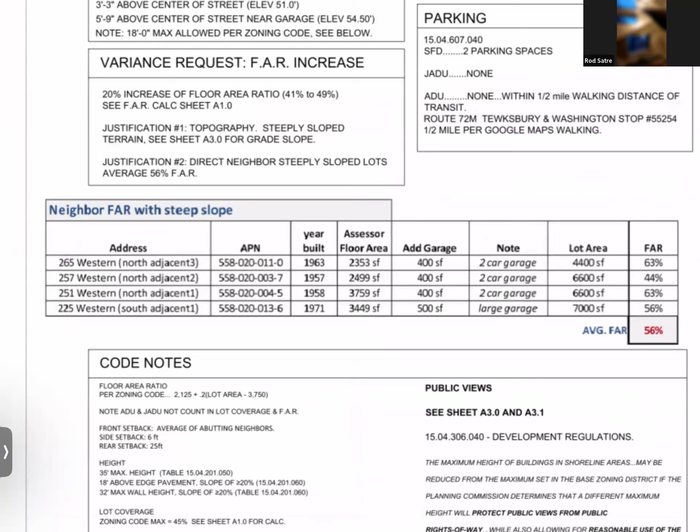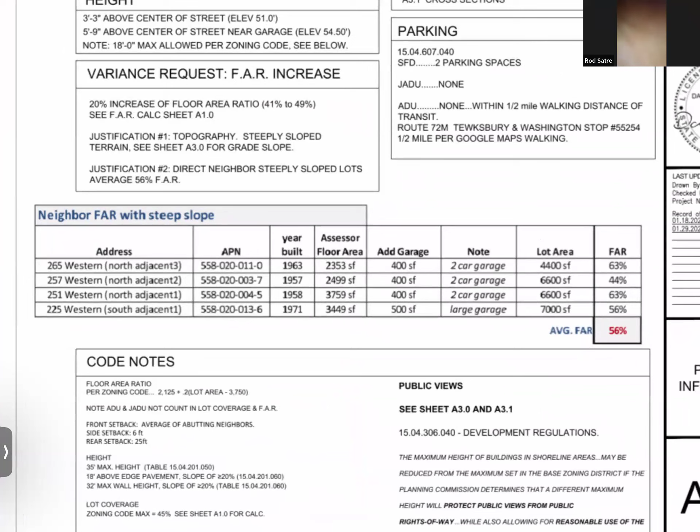Well, one of the things I did is I added the data for the floor area ratio for the adjacent neighbors with similar lots. The planning department asked that I put that on the drawings since we talked. And the average is 56%. You can see the numbers.

And what we're doing as far as the variance request is a 20% increase. The way they calculate it is tighter than it was in the past. So 41% is the code allowed, and we're asking for 49%. That's a 20% increase of the floor area.

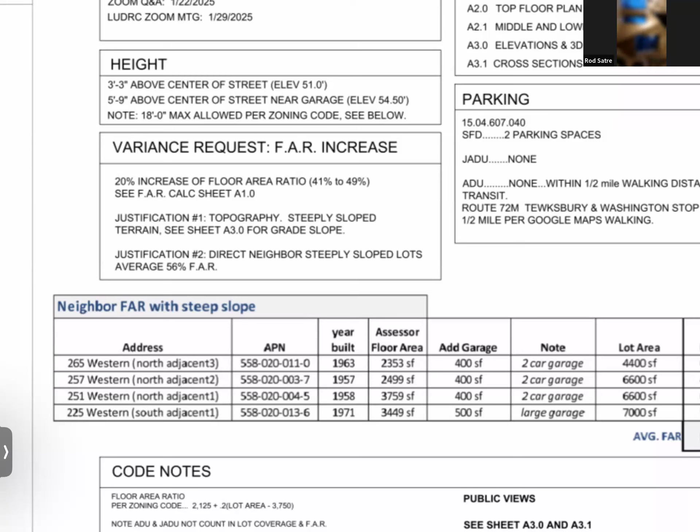Can I ask a question? Can I ask a quick question - are you giving all the neighbors for a comparison that they have the same kinds of variances you're asking for?

Oh well, because you realize they were grandfathered in. Oh yeah, I'm not, yeah, I understand that. The planning department just said when you show the neighbor's floor area ratio as a comparative, do the lots that are, I guess, west of Western, towards the ocean from Western, because they're steep and similar types of lots. Okay, I get it.

Like there, you can see the year built: 1963, 1957, 1958, 1971. There's additions and stuff like that. But anyway, that's it - I mean, again, that's discretionary, so it could be.

Well, they might have had different requirements then - there was no floor area ratio other than for commercial buildings until a few years ago. That could be recent. But new builds are expected to conform as close as possible to new requirements, correct? Right. So I mean, the code is 41%, and we're asking for 49%. That's the ask.

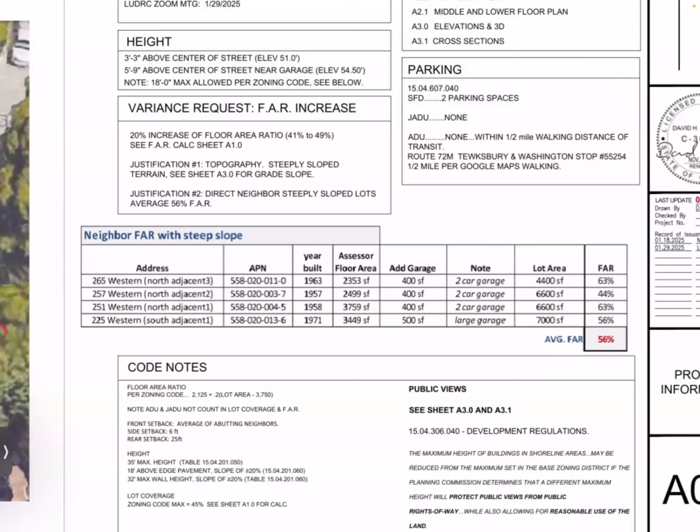You can say no. And the hardship is - the only hardship we can say is steeply sloped terrain. So that's the justification.

Basically the surface area of the lot - imagine you have two lots, same square footage. One is exactly flat, and the one slopes it, very steep, 45%, say, or 45-degree angle. Then the surface area of the lot that slopes actually has more dirt. Yes. And so that's the justification.

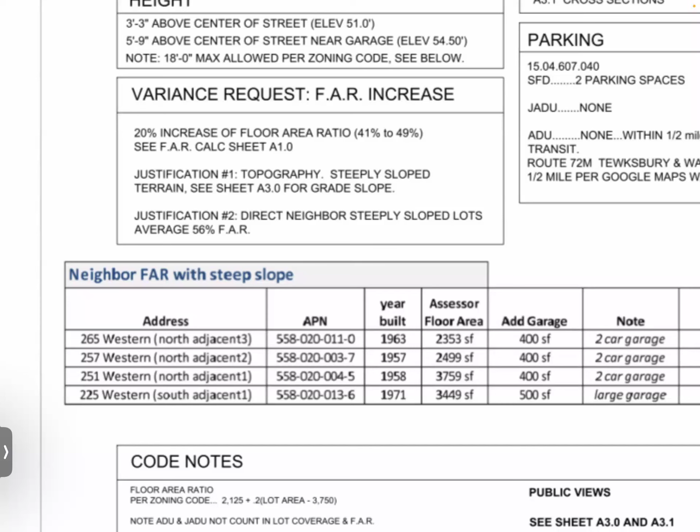So that's what we're asking. Are you guys okay with a 20% increase, a 10% increase, or a 0% increase of the floor area ratio? We have to get all the neighbors to also get their thoughts on what you want to exceed. So that's the one thing we're asking for extra, and I understand that's discretionary. So if we go to...

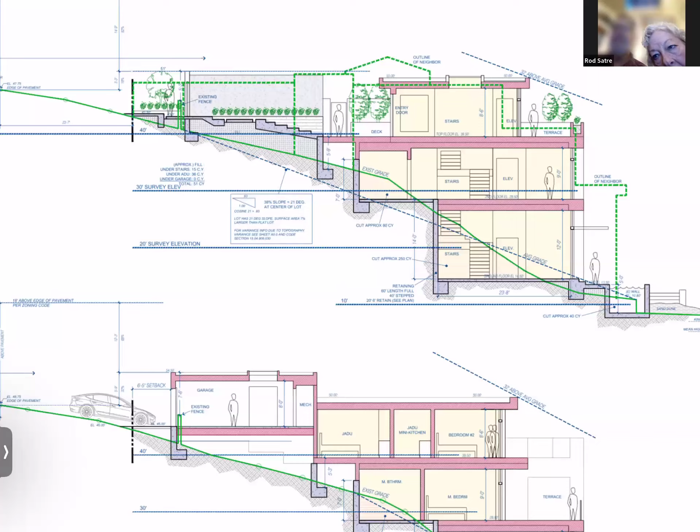Look at, I did the math on that. Hang on a second, let me scroll. Sorry for scrolling. So here it is. You can see the slope of the lot, the surface area is different than the surveyor shows, because the surveyor only does it from an aerial view, assuming your property lines are as seen from space. Here's the math: we got a 38% slope, and so on, cosine, yada yada.

So that justifies 7% on the lot slope. We're asking for more. So that's one thing you guys need to contemplate.

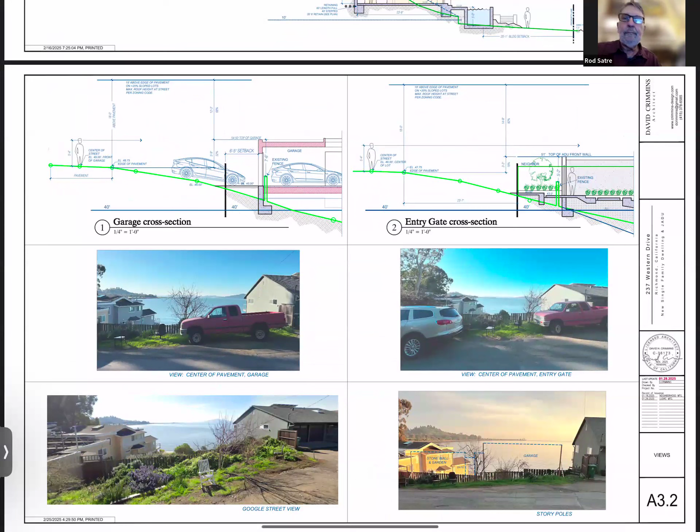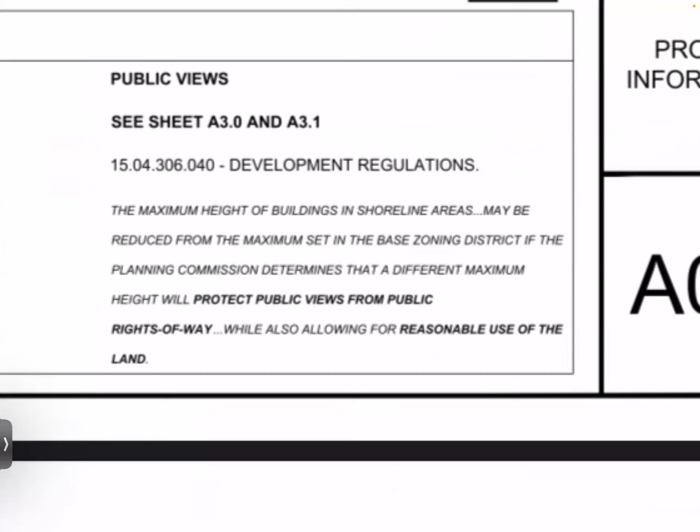And then last time there was some concern about the views. So that's the other discretionary concern. Let me quickly show you, this is a continuation of the conversation from last month. So here's the text, sorry it's a little grainy, of what the code says about views: protect public views from the public rights of way, while also allowing for reasonable use of the land. Now that's fuzzy, but that's the other discretionary item—how much house, how much protected views. So that's what we're asking you guys to think about.

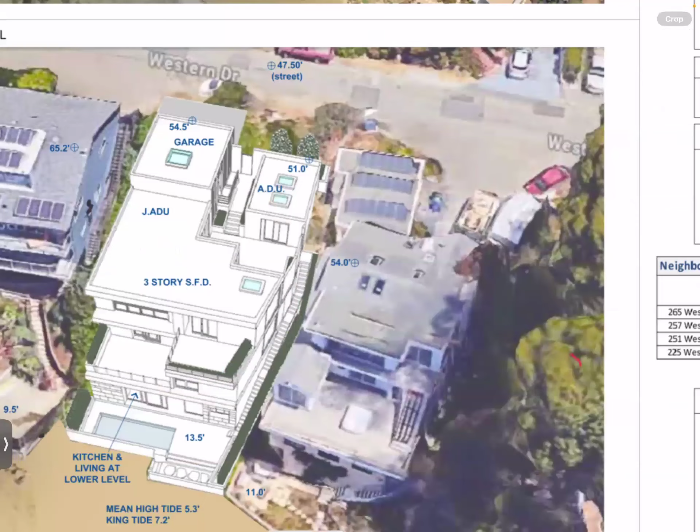And I assume everyone's already seen the shape and size of the house from last month. You said nothing's changed? Yeah, I didn't change the design—I'll take that back. I changed the design very slightly after consulting with the planning department. I'm scrolling.

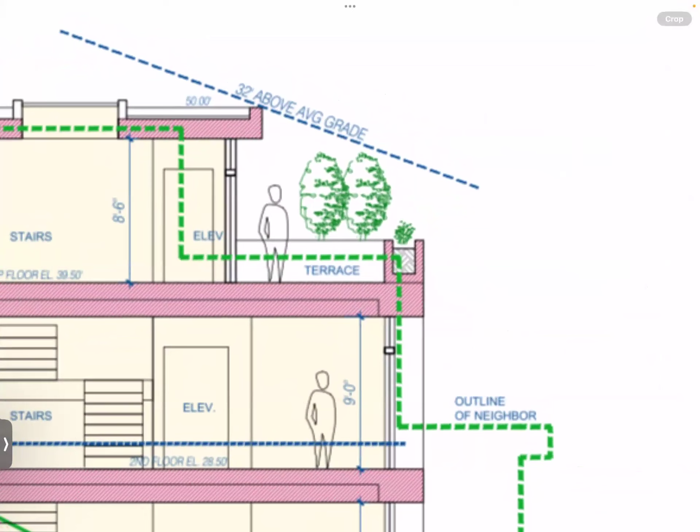See what it says, 32 feet above average grade. And we were a little into that, so I had to cut the top floor back 1.5 feet to manage that. You wouldn't know without me pointing it out, but we were into that 32 foot above grade limit, which breaks a zoning rule. I just didn't want to ask for another variance—it's easier to chop a building by 1.5 feet. So that's really what the change was.

And then I threw all the photographs I have onto one photography page. So you remember this shot here—this is an architectural presentation of the view as you're standing on the road. I took some liberties here, I put this together on the computer. So some people said, well, we want to see the photos, we need to see what it looks like really.

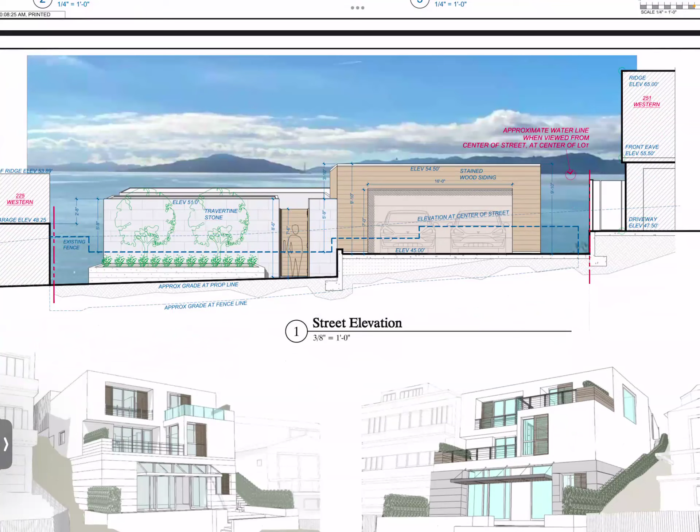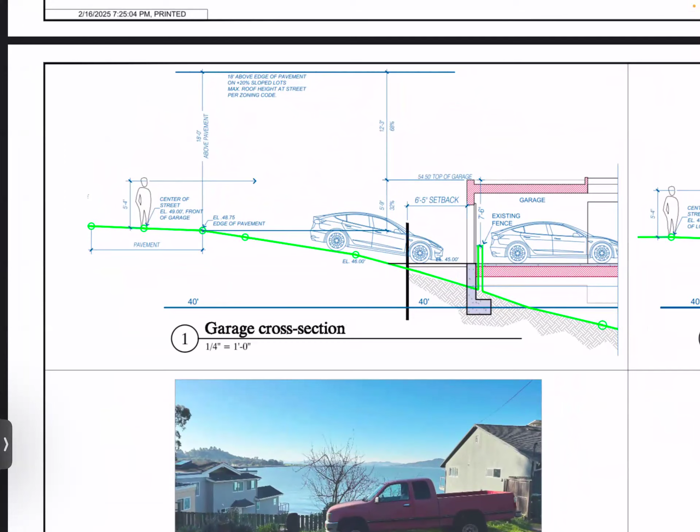So I added a sheet, which is what I emailed to everybody yesterday. Sorry for scrolling, I added the sheet here. So basically, if we do an analysis of the cross section—if we stand right in the middle of the street, in the middle of the garage—you can see the math there, the cross section. Your eye level will be right about the top of the garage. And the code allows us, reading from the code, 18 feet above edge of pavement on 20% slope lots.

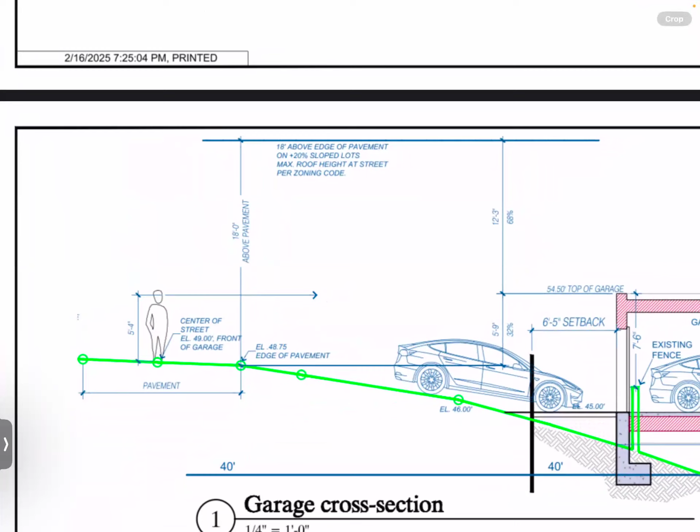That's the maximum allowed by code. But we also read the code that says protect public views and reasonable use of the land. So what I'm doing is showing that the code allows 18 feet, but we've got the views to protect. So right now the garage is at 5'9" of that 18 feet—you can see that there.

Yep, so that's the garage. And the garage is a little higher than we would love—we would like the garage... we don't really want the garage that high, it's just getting a car into it is a factor. You guys can say, hey, we want to drop that garage by 1.5 feet, and I'll have to just work it out, for example.

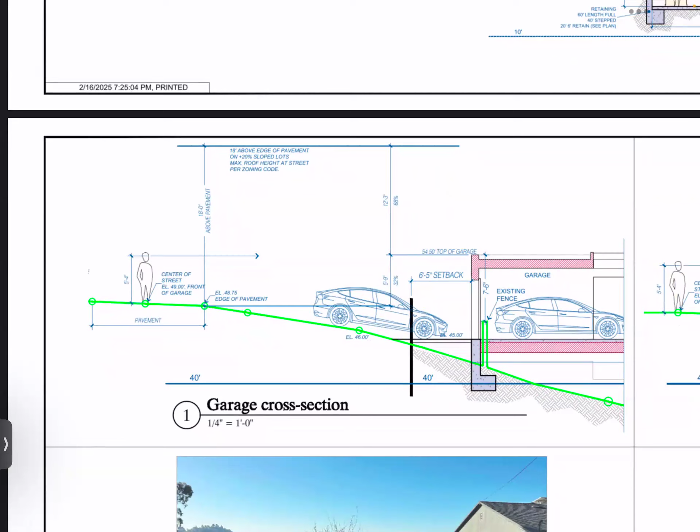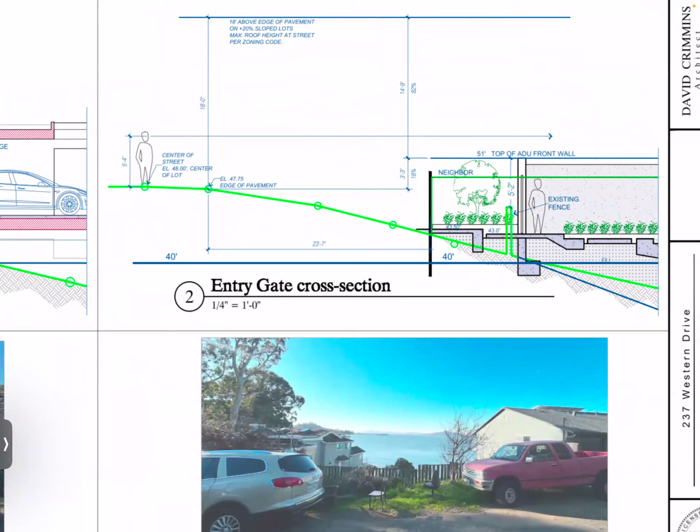And then at the lower portion, this is a cross section at the ADU in the front gate, which you can get some steps down to, you can walk down to it. So that is, you can see the eye level and how you can see over it—3.3 feet, 3 feet 3 inches above edge of pavement. And then of course, someone standing at the pavement is, you know, 5'4" eye level, I assume. Is that 5'4"? Yeah, 5'4".

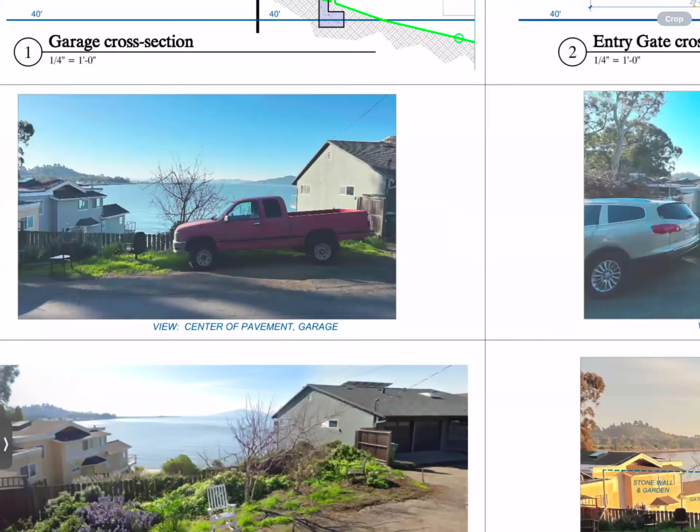So the story poles are up there, anyone can walk by. Anyway, here's another shot. This is center of pavement in front of the garage.

So the top of the garage is 1 foot below the eave of the greenish gray house, the front eave, 1 foot. Is that on the left or the right? On the right. You go to the corner of the eave at that house on the right, go down 1 foot, and that's the top of your garage.

And then the garage comes across approximately to that little tree. I don't have it marked because we didn't have story poles up when we took this picture. And then the other portion of the house drops another 3'10" from the garage, and the sum is it's 5'9" above the fence, that's to the left.

And then here's another shot. This one is from Google Street View. So take for example the yellow house, the garage at the far left of the image, that's the flat roof of the garage.

So we're 2'8" above that flat roof. So if you go 2'8" above that flat roof of the garage to the left of the yellow house, go across the approximate center of the lot, you go up another 3'10", and you terminate approximately 1 foot below the eave of the house to the right.

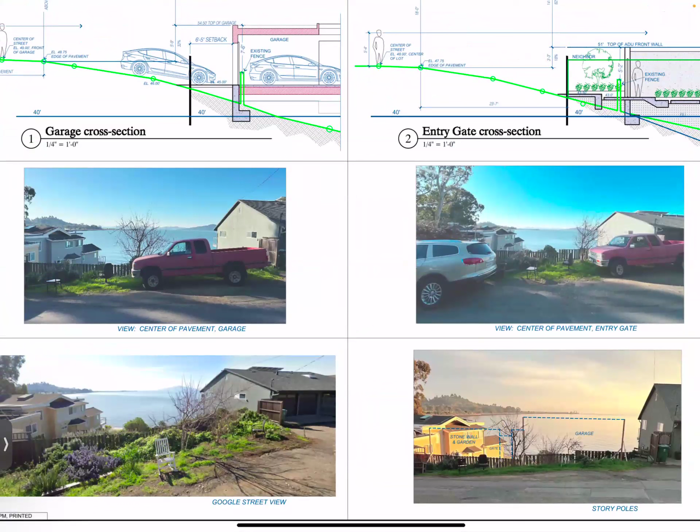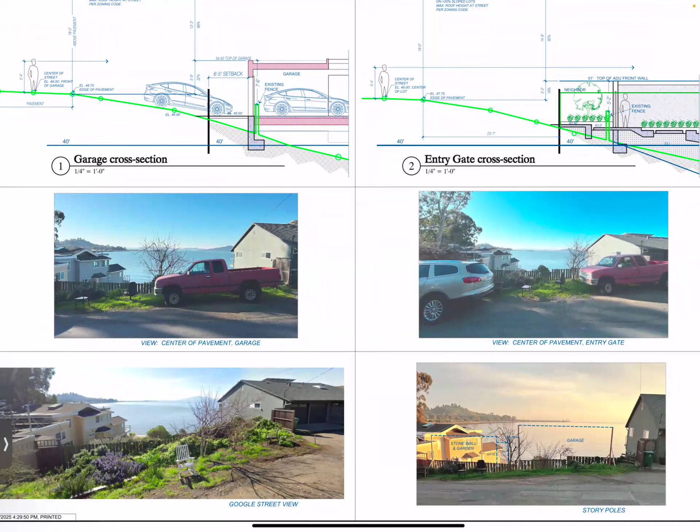And with another picture, yeah, I just tried to throw in all the pictures that are informative, and I show the math so you guys can mull over what best to do. Did everyone see the floor plans and the pool down near the beach and things like that, or do you want me to run through that, or is that unnecessary?

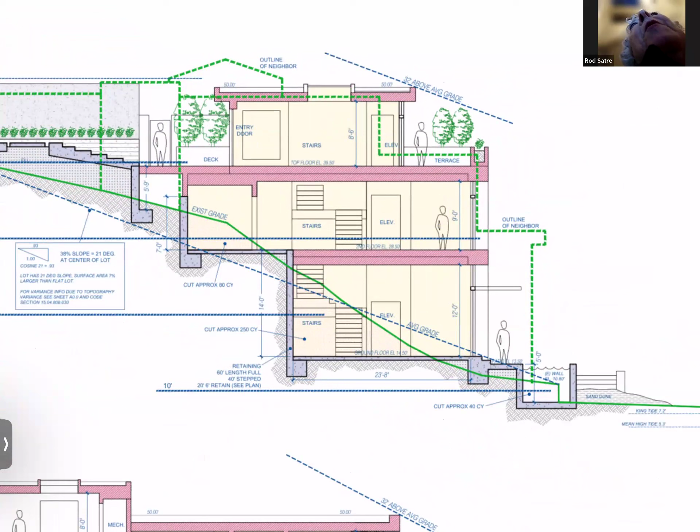So basically what's happening, I'll start with a cross section. So basically all the action is on the beach, right? So the kitchen and the living room will be on the beach, and there's a small pool as well on the beach. That's on the bottom level. Yeah, on the bottom. So the owner preferred interaction with the beach and that kind of thing more than the view.

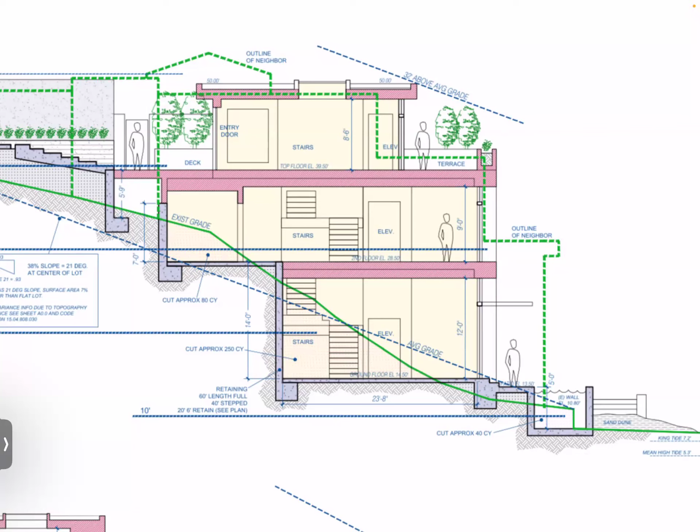And then the middle floor is basically the master bedroom. Top floor is kids' bedrooms, guest bedrooms, things like that, and of course the garage. And there's an elevator in there too, as you can see, ELEV.

And so, in looking at the layout, where is it shown? Here it is. Okay, so this is the roof plan, and you can see what's labeled ADU, that's a guest cottage.

It's about 500 square feet thereabouts, and then you can see the garage labeled. To enter the house, you go through this gate, down some steps to the front entry door, and then it terraces down from there.

So is there two ADUs here? There is a junior ADU and then an ADU. There's a legal differentiation: an ADU can be a separate cottage, while a JADU is connected to the house. An ADU is allowed to be separate, whereas a JADU is internal to a house.

Right, so the separate one is 500 and what square feet? Let me just double check. The ADU maximum allowed is 800 legally, but we couldn't fit it.

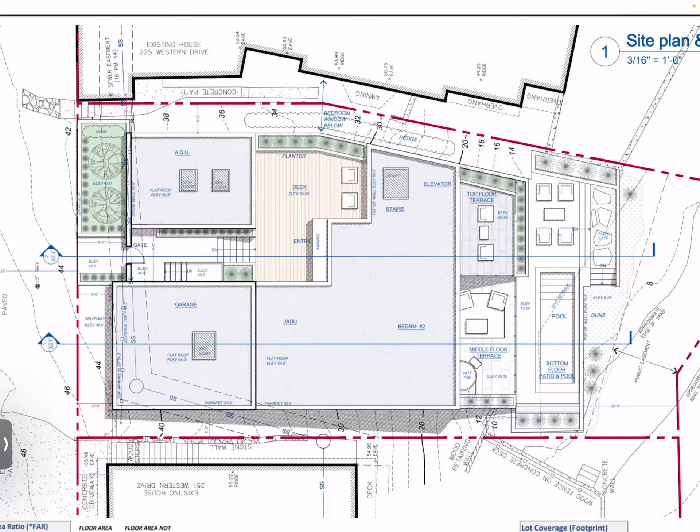Give me a second to look it up... where is the data... I have to get to the right place. So it's on this sheet. Here's the square footages. The ADU is 385 square feet, so it's quite small. That's the separate building one.

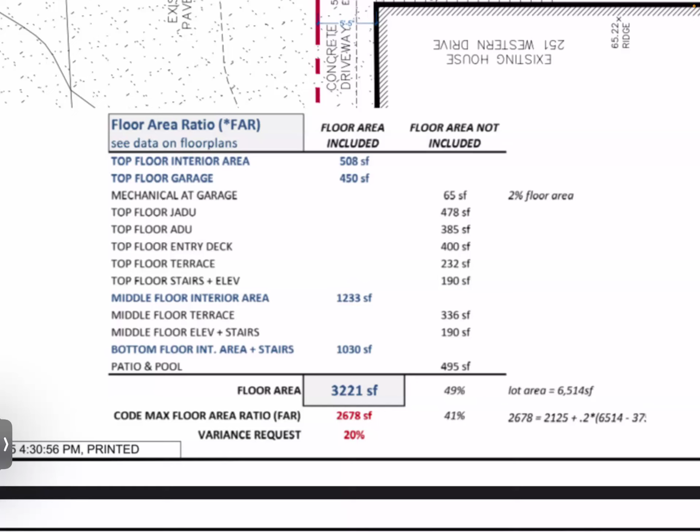Okay, and here's the math on asking for the 20% variance, on the site plan, sheet A10. And by the way, the other thing we luckily don't need to ask for variance on is the footprint. The maximum footprint is 45%, and we're at 40%.

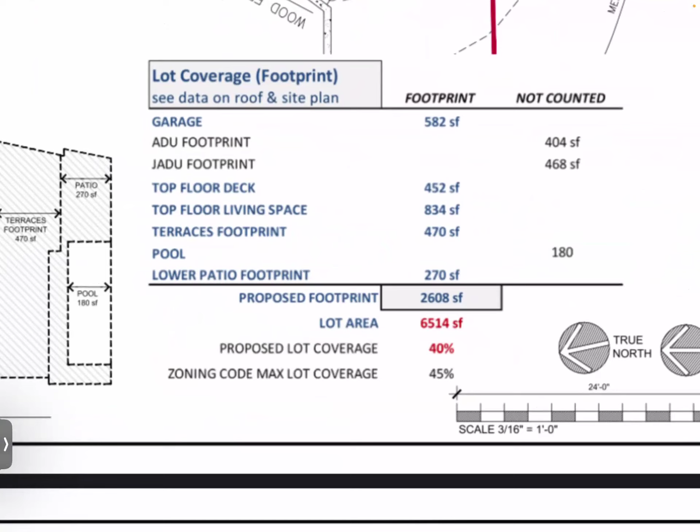That's obviously because it's a 3-story house, everything's stacked on each other, and so the footprint is just the outline, how much dirt you leave. A 3-story house, of course, is going to make it underneath the footprint. That's called lot coverage, same thing. And the total floor area—they don't care about floors, just how much floor area you have. And here we have it.

Is this a change from last time? No, it's the same. Okay, so the only architectural change was I did that thing with that height—the part of the house was sticking out, it was outside of the zone of allowable height.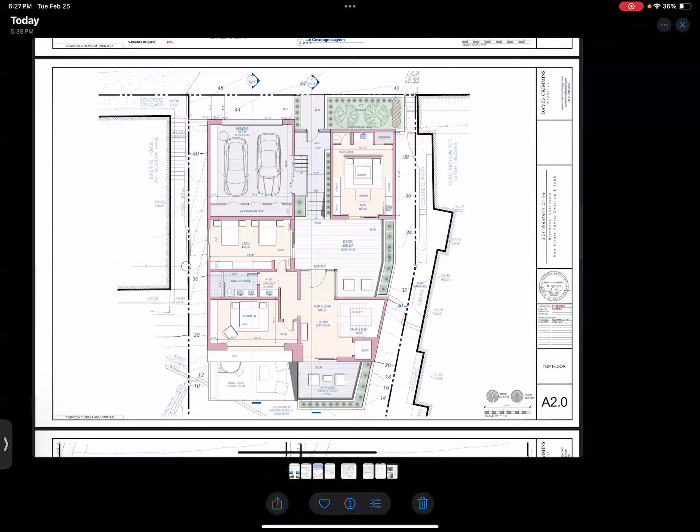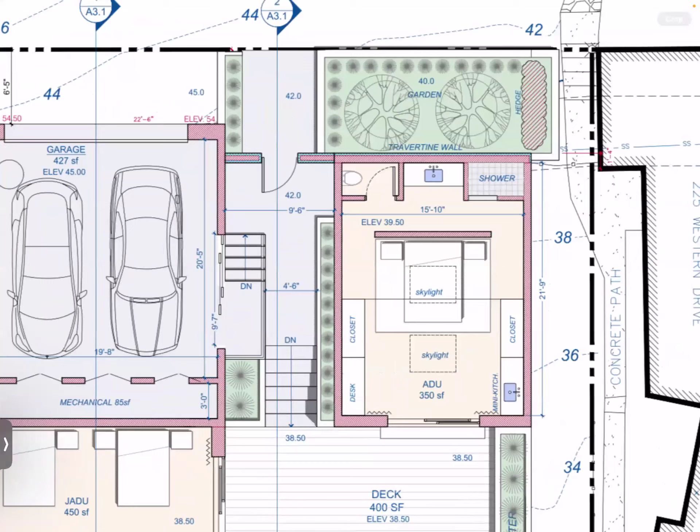For the people who haven't seen the floor plan before, here's the floor plan for the top floor. You go through in the middle, through a gate, and at the street frontage we have a yard, and there's a travertine wall—so for a passerby it should be quite pretty. A travertine wall with the garden in front, and then the occupant goes through the gate down to a deck which is private and sunny, into the entry, where the kids' rooms and guest rooms are. Downstairs is the master bedroom, kitchen, and living room.

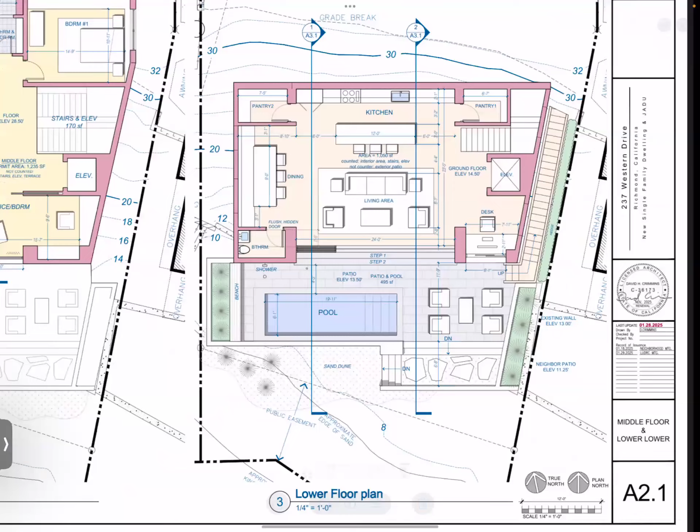And this is the ground floor. Last month, people said BCDC might not want that pool on the beach and that kind of thing. That's the next group we have to go talk to.

One of the questions I wanted to ask is, how wide is the building at the street level, and how wide is the lot? The lot is 60 feet wide. We're required a 6-foot setback on either side, so that's 12 feet total.

So the house is how much? 48, is that right? Yeah, 48, doing the math. So it's 6 feet on each side—you've basically swallowed the lot with the house. I mean, the house has swallowed the lot.

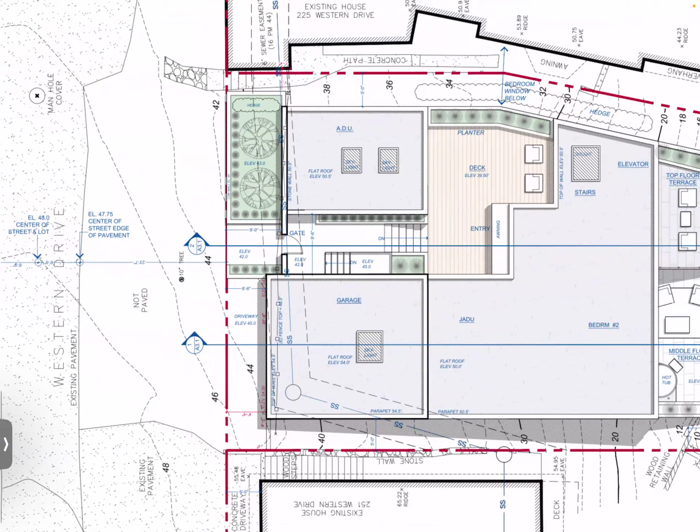It doesn't sound like there are very many view corridors for people to look around this house because it's so big. They can kind of see over it, hopefully.

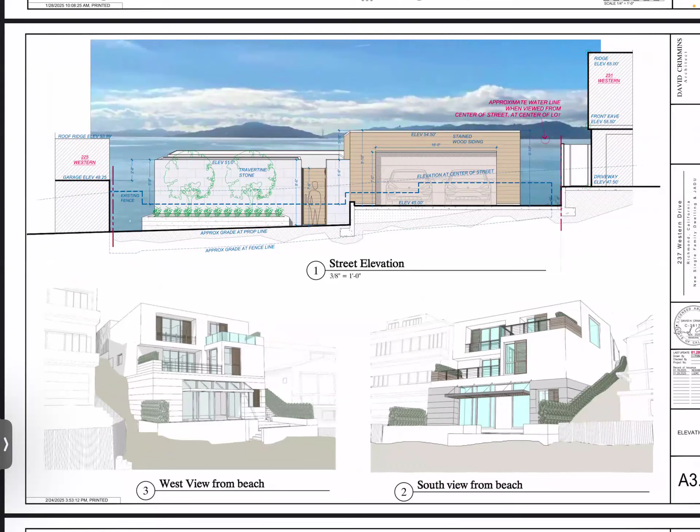I'm sorry to interrupt, but I went and took pictures at my viewpoint, not at the edge but really about two-thirds of the way across the road. I could not see—I drew a red line there if you guys want to look in the chat, we have pictures of it. There is zero view, zero. Looking at the lower poles, unless I go up to the driveway of Susan's house across the street, there is no view. It is completely view blocking for people unless you are tall.

Yeah, I know, we really should have these pictures with the story poles in it. That's why, if you look in the chat, I showed a picture I took and drew a line across the lower poles at my eye level. It's in the handout we sent in, unfortunately late, but you can see in the chat that there is zero view. I can see the sky fine, but zero water, zero land view at my height.

Well, if I hike uphill and go on the opposite side of the street, I can maybe glimpse a bit of the tip of Angel Island. The main thing is that someone passing through is probably not as permanently affected as someone who lives across the street or whose view is blocked.

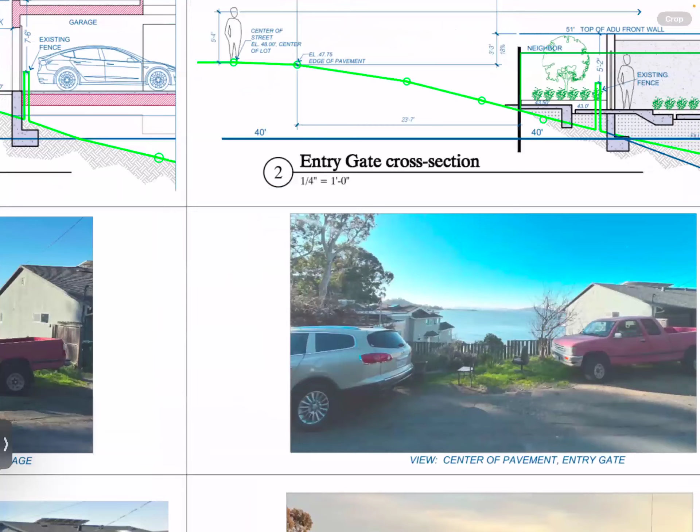And Jan, you are right on the water, aren't you? You're the yellow house. So it's not just for me, but I thought there was supposed to be some sort of, I mean, Jeff Shea wrote when the Knoxes were building their house, that they should keep it low so there's a view corridor. And now there's zero view corridor here. So I'll shut up, I know it's not my turn to talk.

Oh no. I've said all I mean, I've shown it.

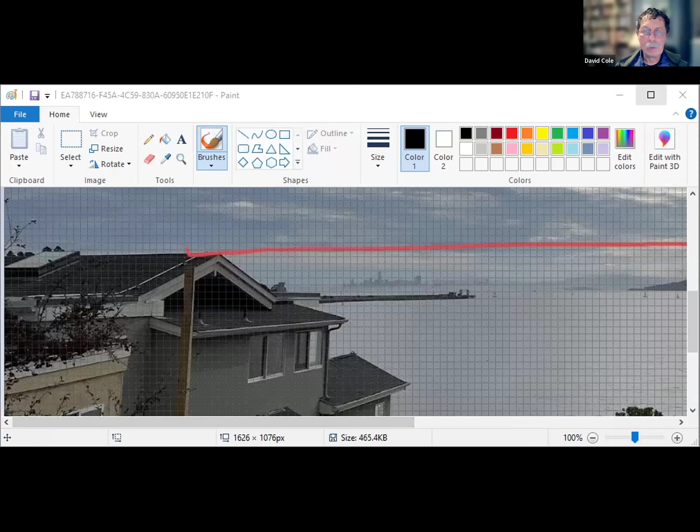Yeah, so well, that's the problem with story poles, they're two sticks in the air with a line across. You can't zoom out to represent a whole building, of course you can't expect them to, they're poles. But that pole is based on the higher elevation on the uphill side. Those were the lower poles, and I took that picture not at the edge of the road, but about two-thirds down, where people might be walking.

Is part of your concern, Jan, the fact that this house is only 6 feet away from the property line? Of course. Is some of it that you're going to be losing views from some of your windows? Oh, I definitely, that's going to happen, but I think he has the right, I can't make, that's just something I have to swallow. But absolutely, yeah, I'm going to lose a lot by him building such a huge house on this lot.

But I just meant in terms of, I thought there was some sort of, not mandate, but some rule that when they build, they have to allow for some view corridor. And I'm just saying, I don't think they're being completely transparent in how much this blocks the view for people walking around. Okay Jan, the view corridor is actually the gap from house A to house B, not the view corridor over the house.

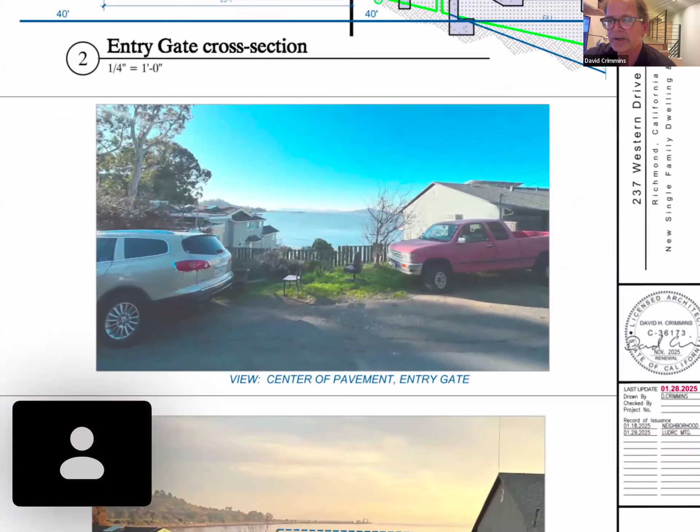I think this view is as close to center pavement, center of lot as it's maybe slightly downhill. I guess the question is it'd be nice if their story poles are in this photo. How much water line does a neighborhood want to see? How low do we have to make this house, and how low do we have to make the garage? The bottom line is it was just 1 foot beneath the eave of the house on the right, so pretty much only the tip of Angel Island is visible.

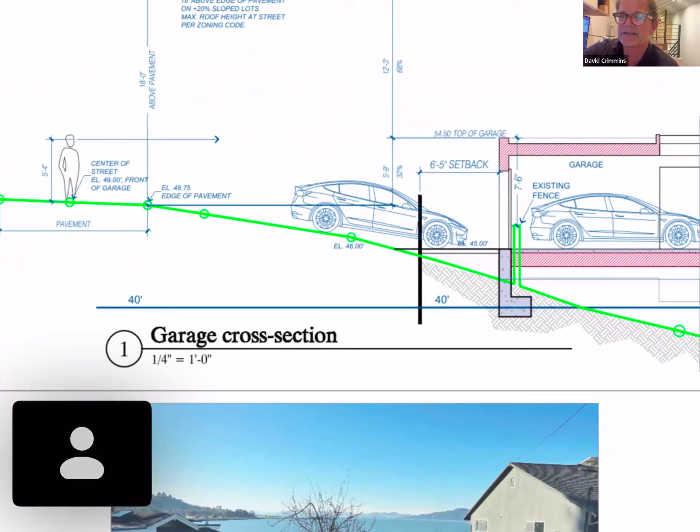Yeah, that's over the garage. So we have two things going on. You can see the figure in front is standing in front of the garage, that's the math for center of garage, center of street, and you can see your eye view gets nipped by the top of the garage. So that makes sense, right? Then the other dimension is where you can see over the house.

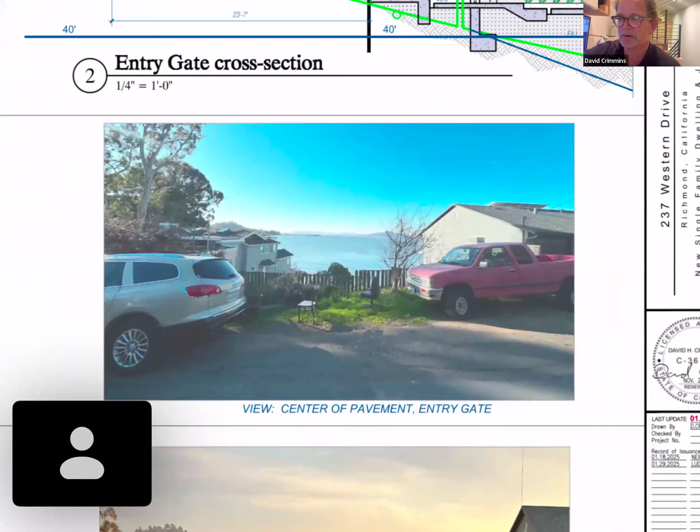And we have to push this down. It's, you guys can, that's what the neighborhood group's for, is to state what's okay and what's not okay. So that would push down half of the house for more view over the house.

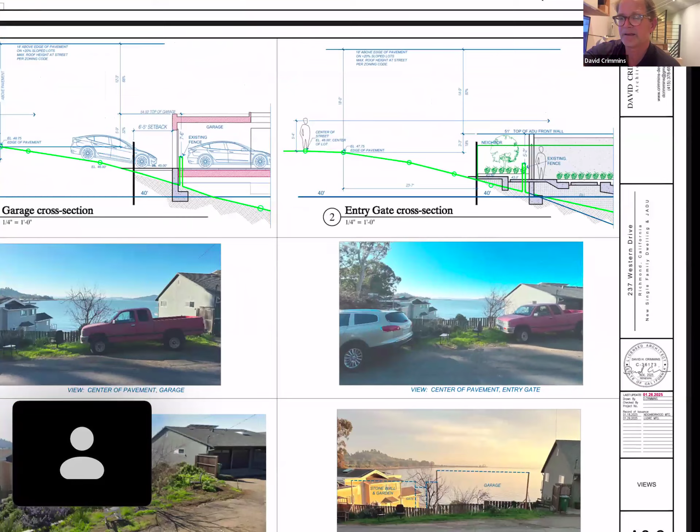Yeah, I mean, how low should we push this house down? And I understand this is like the view, that the picture that one of your members showed was probably taken from the lower part of the street. This is taken from the upper part of the street. So this is the best, right?

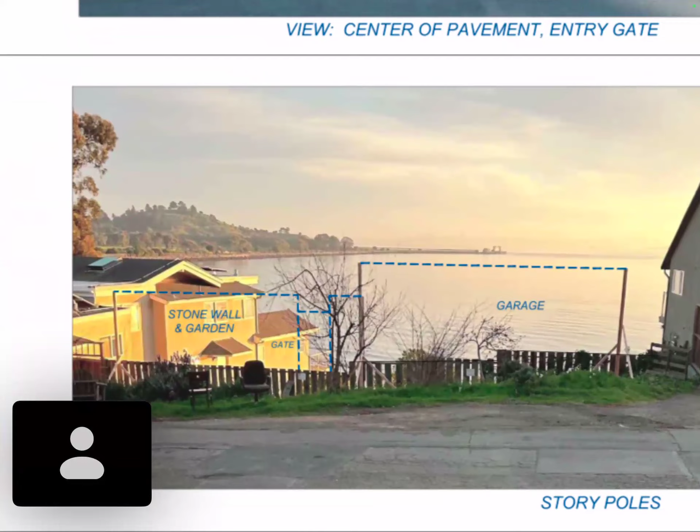The builder sent me this picture, with the story poles put up. And of course, as you go downhill, that dotted line starts lifting in comparison to the water.

Okay, all right. Let's open it up to our committee. Bonnie, do you have any more questions? No, not right now. Okay, Peter? Not really, no. I'm still absorbing it. Maybe you guys are having the general meeting tomorrow, right? Yes, yes.

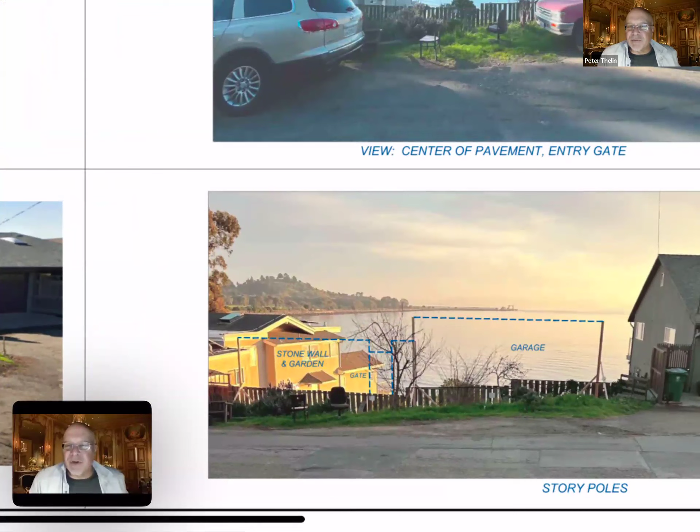If given time, you can take a picture of center of lot, center of street with the story poles. Then it's less of a debate on how much, then it's very clear. Actually, I have a suggestion, that picture in the bottom right with the story poles and the drawing across it, this bottom right one. You go into Photoshop or something and just fill in the spaces between the poles, and I think that would portray a more accurate idea of what we're doing.

Except that was not taken in the middle of the street. David knows that was taken sort of at the bottom of Susan's driveway. So I think taking one that is, like they mentioned, in the middle of the street, maybe at a 5'4" level, I'm only 5'1", but a 5'4" level in the middle of the street would be more accurate. Yeah, this was done at a higher elevation, not at 5'4", it was basically at the bottom of Susan's driveway, I remember. And actually, that would be good to do.

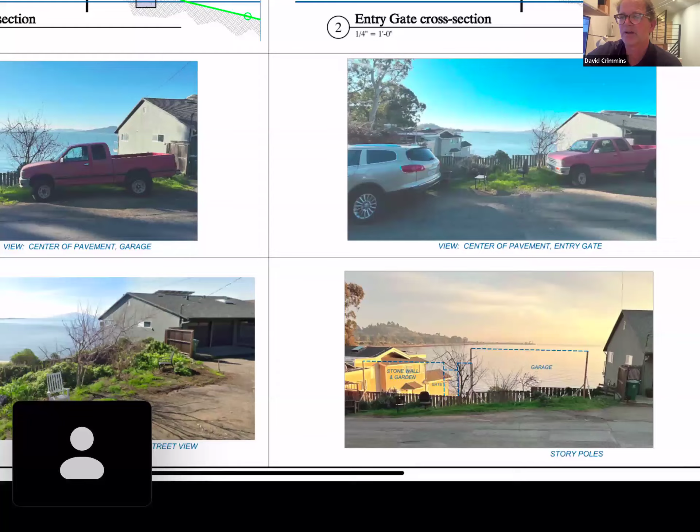Okay, David, let's move on. We'll go try and do that and share it with everybody, and send a copy to Philip Rosenthal, and we'll put it on the web too tomorrow. Because what I tried as a comparative, this is kind of trying to do what you're saying, but this is obviously done on a computer, this image.

And so, naysayers can argue with this all day long, but I'll try to get this straight-on shot right in the middle with the story poles, and then do an infill like you suggested. Maybe I can infill this. All right, we'll do some homework between now and tomorrow.

All right, and then, you know, we're looking forward, we got to move on so we can get everybody in here. Charmaine, any questions?

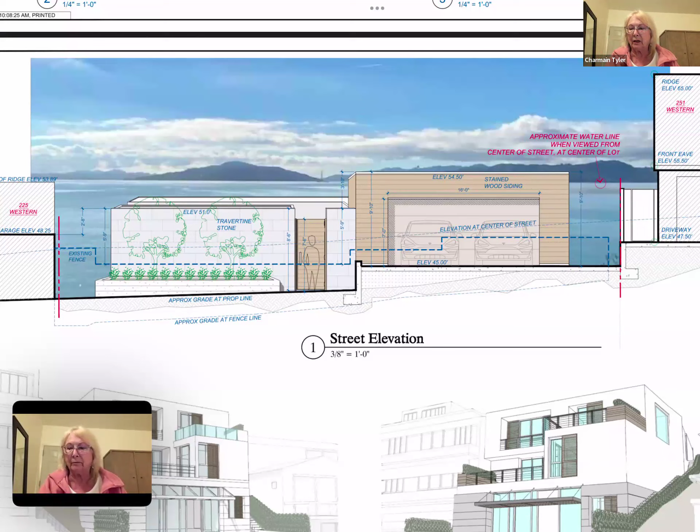Yes, I'm sorry that I missed the first meeting, but I wanted to ask a few more things, like parking. I think somebody brought that up in the chat for ADUs. I think we need parking. And also I was concerned about the water drainage, is that going into the bay? And what about hooking up to the sewer? So that's like three things: water drainage, sewer hookup, and parking for ADUs.

I was just on the phone with Mary Phelps in Public Works about the sewer hookup. And in that moratorium, which is well known, she said to me that she didn't give it approval, but she said connecting to the sewer pipe that's on Western is likely okay, and connecting directly to the sewer pipe that's under the beach, that's the fragile one everyone's concerned about, that's TBD whether that's okay. But she said it should be fine to connect to the sewer pipe on the street. But that requires sump pumps and stuff like that, so it's not ideal, but that would be a lot better than trying to tie into a pipe that's 59 years old.

Well, right, that's basically what, surface. Yeah, that's what she said. She goes, that old pipe, right now we're not allowing any new physical connections to it, so you're gonna have to pump uphill and connect to the street. And that's the sewer thing.

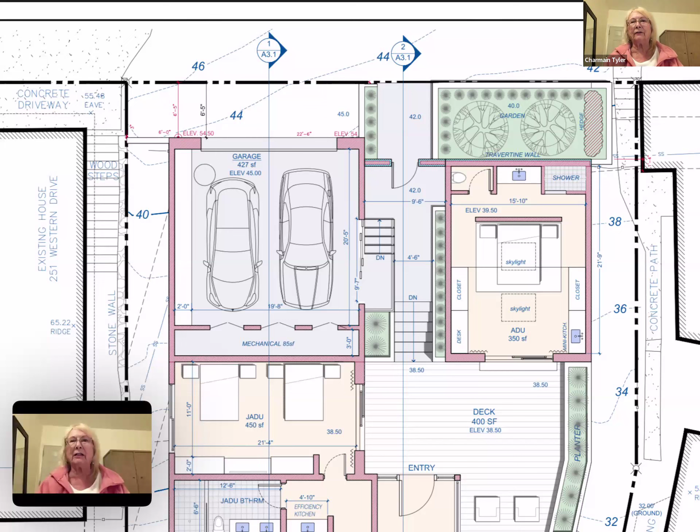So you have to try to stay off the street somehow, so if you need to push a little space, even they can park sideways if they have a small car. Well, Western is kind of unique in that, can you see to the left of this screen here?

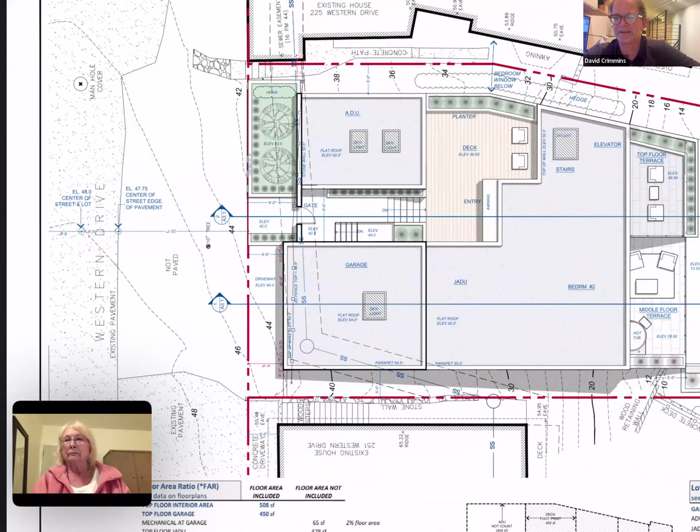See where it says not paved on the site plan? There's a lot of, oh yeah, that's that sloping area where I guess most people walk. You can also see the steps of the neighbor. So the property line is further away from the pavement than you might think, just saying.

But if we can step the garage back so another car can fit in front of the garage, that would be a pretty good thing, I think. What about David, does David want anything? I think that'd be a good idea myself, but I don't have any other questions at this point, except one.

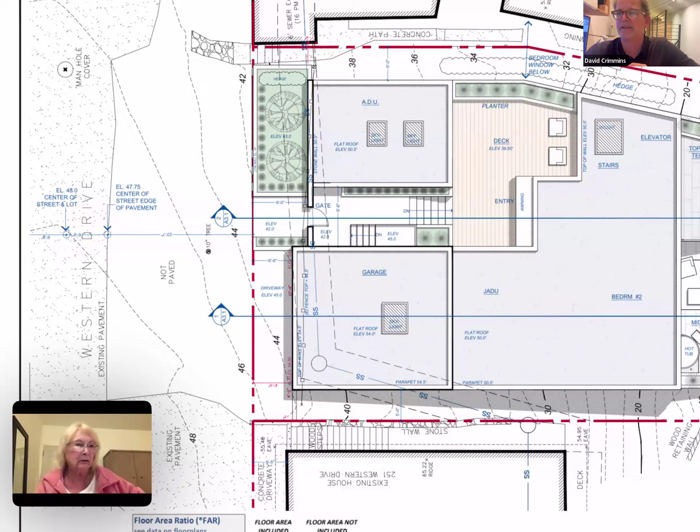You're not planning to put a fence in the front anywhere, are you? Oh, no, let me look, no fence in the front yard. The view is better than a nice travertine stone wall and a garden, but that's what's happening in the front yard right there, a stone wall and garden. It won't be a view of the Golden Gate Bridge and Angel Island, but that's okay.

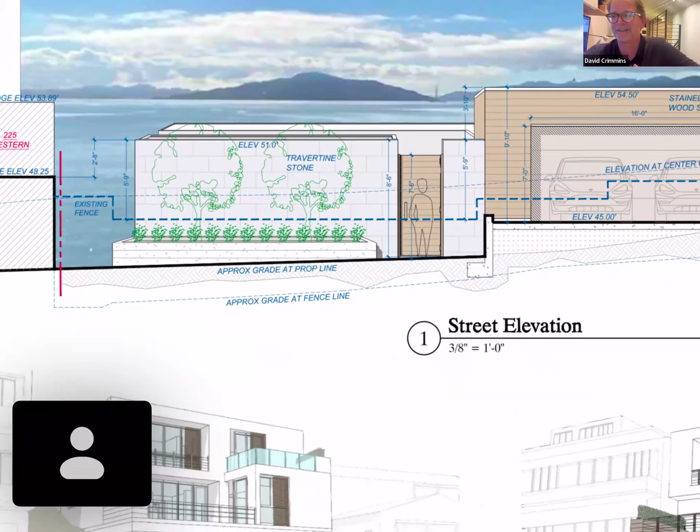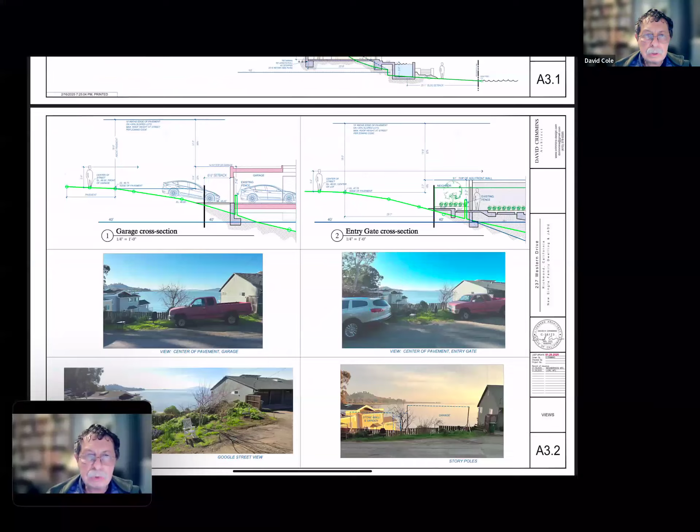Questions from David Cole? Yeah, I did have a question, returning to the issue of the picture and the view. Looking at the picture, I guess we're looking south, is that right? From the right to the left of the picture, the street slopes downhill. So if you're taking a picture of that view from the middle, you're going to be higher in relation to where the ADU or the JADU would be.

Correct. So I would like the picture to be centered, or get closer to where the space between the two houses is, and see that accessory building straight on. Oh, I see what you mean. Okay, hold on, let me go back.

In other words, right now you're looking downhill at it. So if you proceed to your left, everything's going to get higher. I would like to be able to see it as if you were standing in the one spot where you're going to see anything.

I'm assuming that's reasonable, you need a garage, and there's not much way around making changes there. But I'm feeling like that ADU, or the JADU, I don't remember which, could be adjusted down. It would mean adjusting the whole house down some, but it would accommodate more of a view.

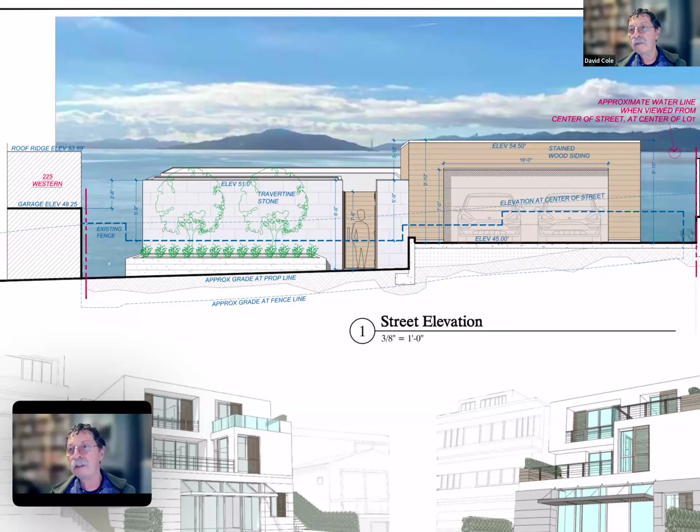If the planning department tells you that you meet the requirements, that's their prerogative. But I would like to see some accommodation to at least give a little bit more view above that stone wall.

So just as a reference point, the exact center of the lot is just inches to the right of the entry gate. Right, but I'm thinking inches to the left of that gate. Or presumably to the right, sorry, take it back.

Presumably the concern here is not for the neighbors. I haven't seen anything that indicates the people across the street are having their views significantly impacted. The issue is really for pedestrians on that street. That's what we're talking about here.

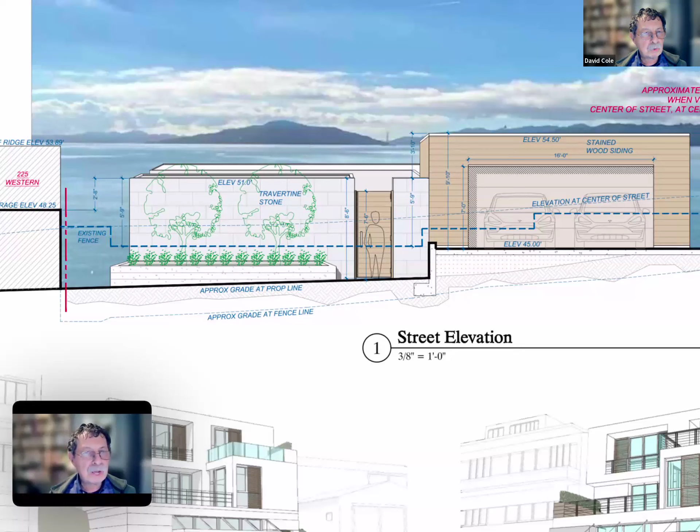I would want to see - now the pedestrian on that street standing in front of that garage is going to see the garage and may see a little bit over that stone wall. As they proceed south, or east, whichever it is, that wall is going to get higher in relation to where they are standing. So as they get closer to the view, there will be less of the view.

So I would like to accommodate, get as much as we could squeeze out of it.

Sorry to interject - it sounds like we want one photo dead center of the lot, like the planning department wants, and one at 25% of the lot. It's 60 feet wide, so one's at 30 feet in the middle, one's at 15 feet from the edge, and one is at 15 feet from the other edge. I would like that because I think it tells the story better of what the experience of being on that street would be for a pedestrian.

Susan too - oh yeah, and also it'll save everyone time. This is the second meeting we've had on this, I mean I'm coming from my own home, this is no problem because it's Zoom, but it'd be better to conclude.

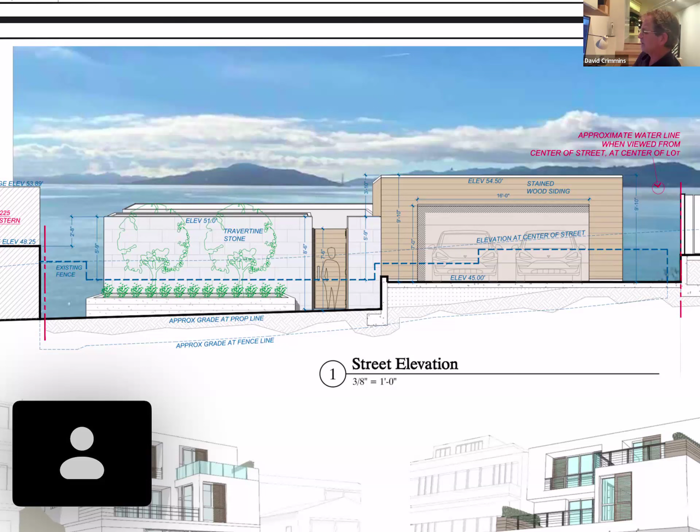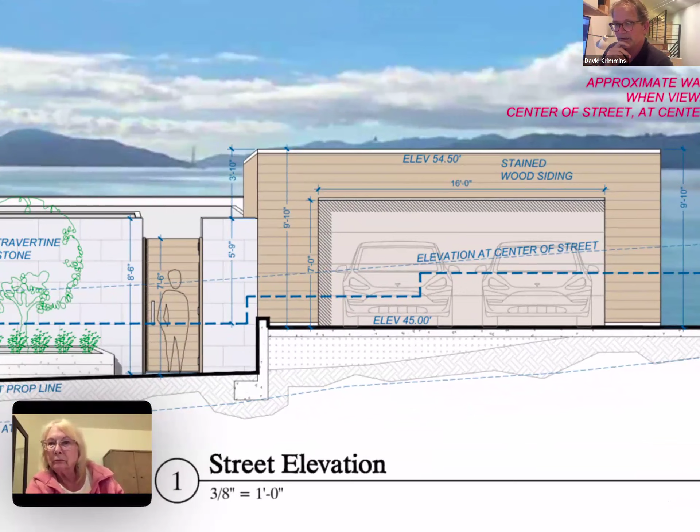The clear height, the ceiling height of the garage is, sorry, I think it's 8 feet. So we made that 8 feet, but then the overall front height is 9'10" because there's the roofing and blah blah blah. But the clear height, which winds up to be 9'10" to the very top of the parapet.

That's the dimension right there. You need the parapet? Well, we got to slope the flat roof. I mean, economize, but it's going towards the bay.

Yeah, I mean, we could always squeeze 6 inches out of it once we get into details, but I hate to paint myself into a corner. The parapet's got to be 6 inches, 4 to 6 inches above the surface of the flat roof. The flat roof itself has to slope, and you got to give it 6 inches to slope and move, and then the roof itself is roughly a foot.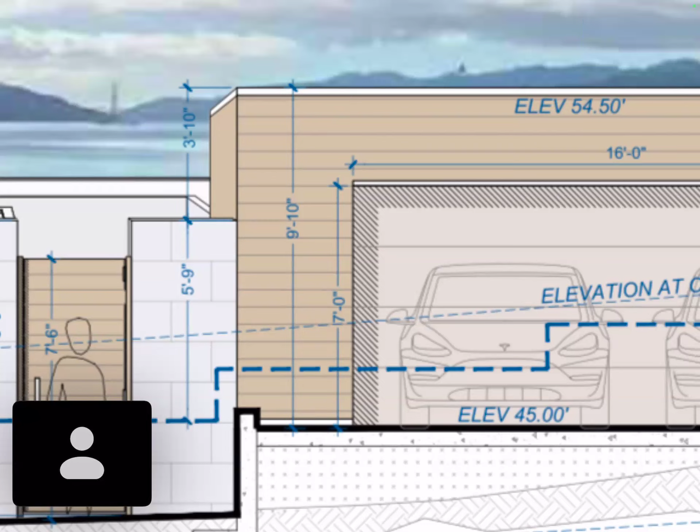Okay, so we got to move along here and let the neighbors have their say. Graham, I'll start with you. Unfortunately, your email was received at 5:50 for a 6 o'clock meeting, so I didn't have a chance to review it.

Sure, thanks, I understand. I only got the documents I was responding to yesterday, so it took me a while, but I'll try to get responses as quickly as possible. My concern is that it'll definitely change the character of the street. Every nice day, a few dozen people walk by here, walk their dogs on the street, and they do appreciate the view of the water. It's a question of what's reasonable use of the property.

It's not a huge property, and a lot of builders can come up with something that's within the floor area ratio. This isn't only requesting a variance of 20%, but that's not even counting the ADU or the JADU, for which there is no parking. And there are other ways it could be built better to serve the community interests more.

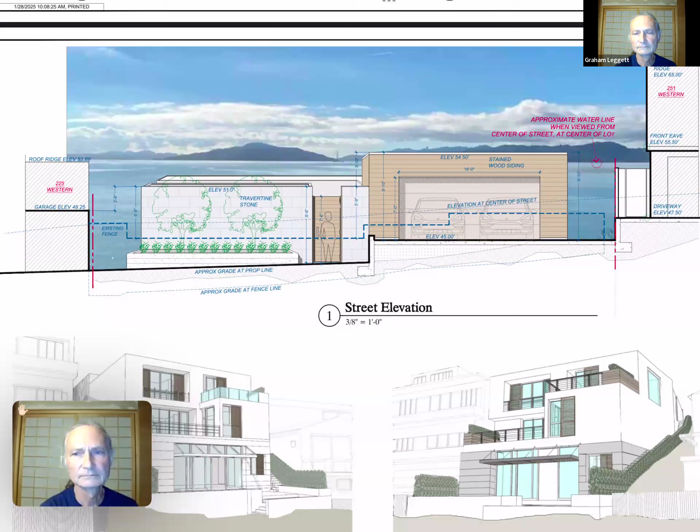Okay, I've got more people and I only have like 25 minutes or so, so I'll go with Susan Glendenning. Oh, thank you for all the committee members' comments. I really appreciate your thoughtful contemplation of this project, and I appreciate Graham's comments as well, and Jan's.

I'm the neighbor across the street at number 240 Western, and I want to just mention, speaking of our view, it's absolutely blocked from our patio and our downstairs area. I understand there needs to be reasonable use of this property, I get that. So what is reasonable, as Graham mentioned, every project needs to be considered in the context of where it is.

And I just think that maxing out the square footage of this property seems overkill, especially when you're asking for a variance. It's sloped, but not as sloped as many slopes are. But anyway, having a variance of 20% on top of additional square footage that's not even counted toward that variance factor, because you're adding those 2 bedrooms called ADU and JADU, it seems a stretch.

If there's ways to shrink the footprint and the height of this property, that would be much appreciated. It sounds like from the architect that you can do that, but you're waiting for us to ask you to do that, and so I am now asking you to do that.

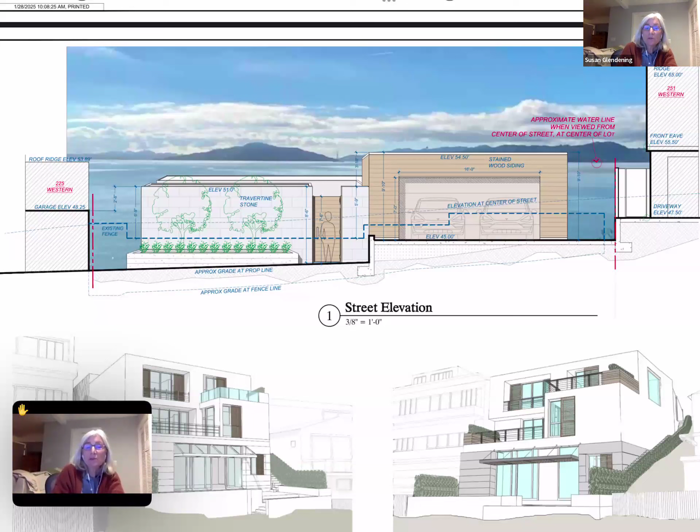Then also about the view vistas. It's part of the city's code in the shoreline overlay city ordinance that says you need to preserve views and vistas, not just your view corridor. That's not how it's defined. It's a view and a vista, and we're talking about the Golden Gate Bridge, these iconic areas, Angel Island, etc. So this needs to be considered as well, not just the view corridor side to side of the house, but also over the house.

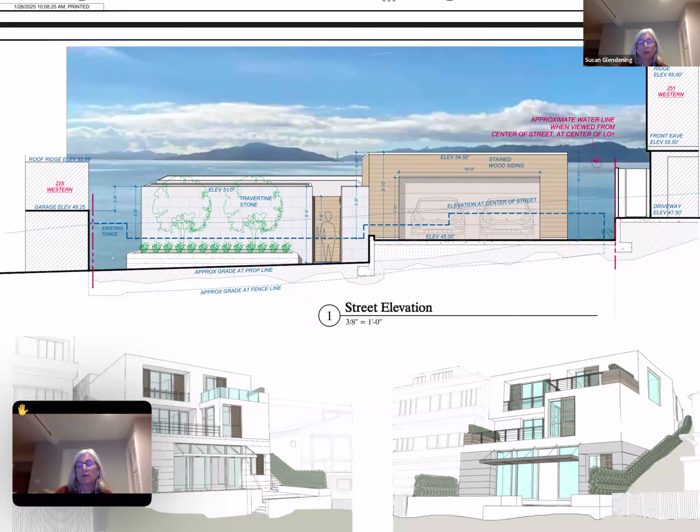So, talking about our view, it is blocked, and we would like it to be shrunk, the footprint, size, and the height to be lowered. So thank you for listening to my comments.

Okay, thank you. I saw Russell's hand was up before, but I don't see him on the screen anymore. Are you there, Russell? Speak right now. Otherwise, I'm going to Chuck. Thank you, Rod. No need to, Susan said it all. Okay, sure, appreciate the opportunity.

Okay, Chuck, thank you for listening to comments. I appreciated the comments of neighbors, and Graham's and Susan's comments in particular, but can you help me understand something? As I understand it, you have a little bit more freedom to design a larger place because of the ADU and the JADU. What I don't understand are the rules surrounding that, because I wonder whether you actually do intend to rent out the ADU to someone else, or what its purpose may be. I appreciate Graham's comments about perhaps using the area where the ADU is to place the garage, which would lower the overall sight lines, at least from the street. So can you please help me understand a little bit about the purpose of the ADU and the JADU, other than as kind of a straw man or a mechanism to increase the square footage of the proposed property? Thank you.

Talked about that, and I'm going to state from that comment and also from Graham's that swapping the garage to the left, the south side, and then you can put an ADU, which would still be the same footprint, but you didn't have to have it at the elevation you have because you don't have to put a car there. So you could push that all down, and maybe have — we've had people put in 7-foot ceilings with open beams so that the roof structure's support is visible, to shrink a house down as low as possible. So the ADU could go in there with 7-foot ceilings and the gap between the beams.

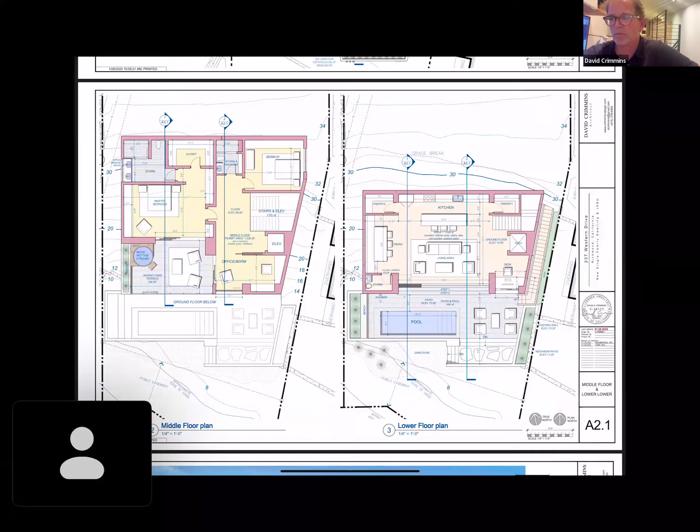See that deck? That gets really great sun - that kind of drove where the garage is. And from you guys, so flipping it is a good idea. That'll open up the view. I get it, because that garage suddenly gets lower. The other thing to consider is what the bottom line is on - hold on, I'm scrolling, sorry.

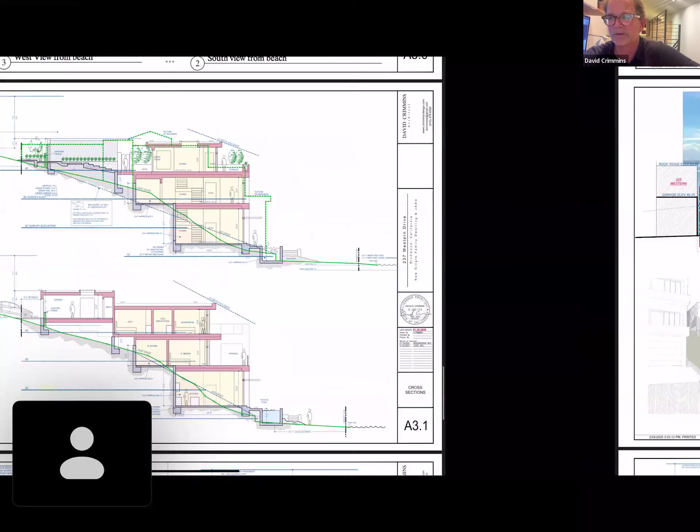How low do we have to make the house? See how we go down a bunch of steps to the entry door? What's the number? How much blue above the house must be seen? I think the photographs will be helpful - right now you can see we're 3'3" above the street at the center of the lot. And how far do I push this thing down?

Flipping it will work well, but that might screw up the architecture of it - but, you know, boo-hoo. Back to it: how low do I make the ADU? How low can I get away with the garage? How much blue do we need to see above the house, right?

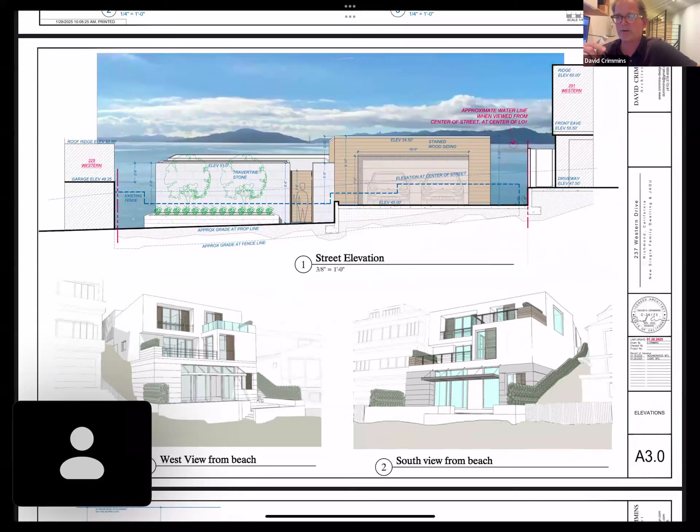So I probably need to get new photos for tomorrow. Like you can see here, above the ADU, let's assume the story poles will drive this - how much is necessary to see? Do we need to see all the way across? Can the garage break it up, or can it not break it up? Because if that garage was down 3 feet, I'm sure we wouldn't be having this discussion right now, because then you can see the horizon line all the way across, which would be pretty cool.

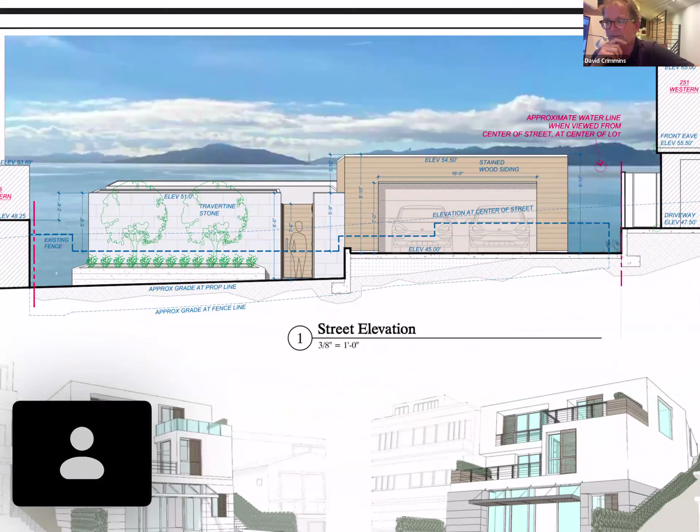Anyway, that's all my comment. And that 12-foot thing on the bottom - you can see how what's driving the top floor is how many steps someone can tolerate to get to the front door, and the remaining is the 12-foot height of the ground floor.

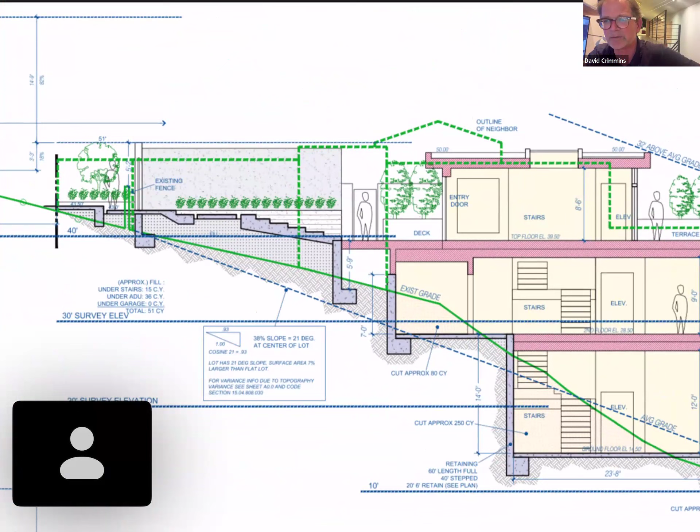It'd be cheaper to raise the foundation and have, for example, a 10-foot height, because digging into the earth is expensive. That might be a cost-saving thing, but what's driving the overall top height is how many steps you can tolerate to step down to get to your front door. I think it's seven right now - 1, 2, 3, 4, 5, 6, 7, 8. Anyway, that's my two minutes. Thanks everyone for considering this so carefully.

You want to say something? Does anybody else on the committee have any ideas for a motion?

I'm headed towards the idea that we just hold this over, because I don't think it's likely we can all get changes in this short amount of time for tomorrow's meeting. I'd like to say tomorrow's meeting will not be a detailed meeting, it would be a summary. So I agree with you, Bonnie and Rod, and I'd suggest we ask for some alternative views, some options that may be more pleasing for the neighbors.

I think now is the time to make any changes if possible, so that it fits more with people's idea of how it should be in the street, the neighborhood, the view areas. We don't have to wait a whole month, but we normally do. We'd have to wait a month so they could come back with changes for the next neighborhood council meeting.

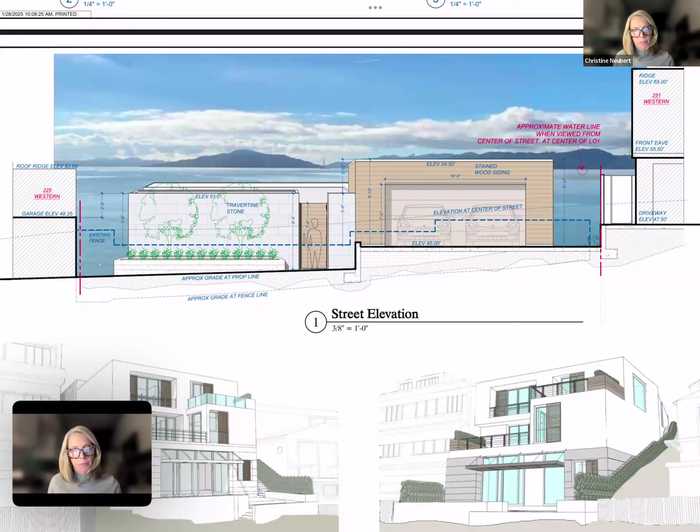Can you please put poles at the back, at the beach side of the lot as well, so we can actually see what the renderings really would depict? And also, can you make sure to get the plans to us sooner than just the day before? And also please put me on the email list, I didn't get notified. I sent the plans out over a week ago. Oh, I missed it, thank you. Sorry, I'm not sure what happened. Maybe I'll look at my spam.

Okay, are there any other comments from anybody? No, we just made a motion. Okay, the meeting's already over, approved it. So the meeting's over, I think. Meeting's over, okay, all right.